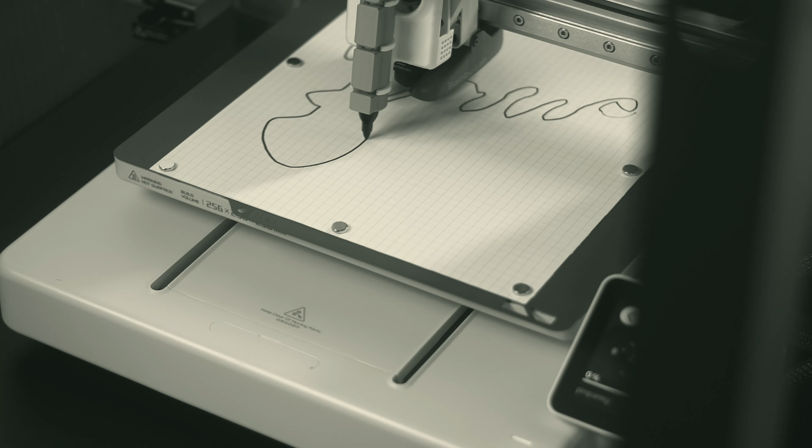I needed a better pen holder for my A1 printer. Instead of just waiting or wasting filament on poor quality prints from MakerWorld, I decided to waste filament on my own design and see if it would work.

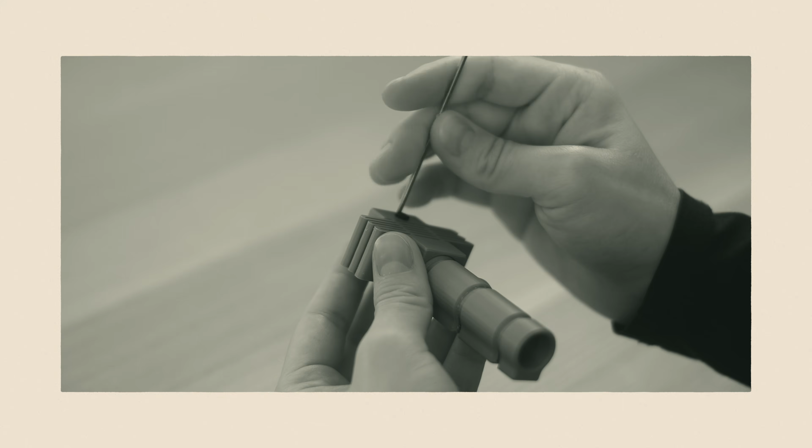My goal was to build a pen holder with only 1 degree of freedom along the z-axis, so the pen can adjust to uneven surfaces and still produce precise, consistent prints. Based on what I learned in my last video, I added a few more requirements: the design should need little or no support and use an optimized print orientation, no screws should drive directly into plastic, and the holder should not damage the pen or print head. It also needs to keep the pen centered and steady, no matter its size, and work with different pens without using tape.

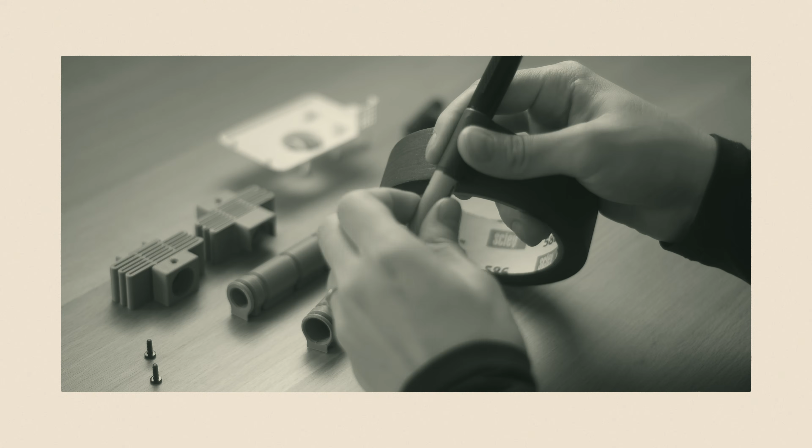With these requirements in mind, I found some good ideas on MakerWorld and combined them into 2 main parts. First is the front cover, which snaps onto the print head with tension clips on one side and holds 2 8mm rods on the other. Because of this design, I could not print it flat, so I printed it vertically on its side and added a rib mesh inside for strength.

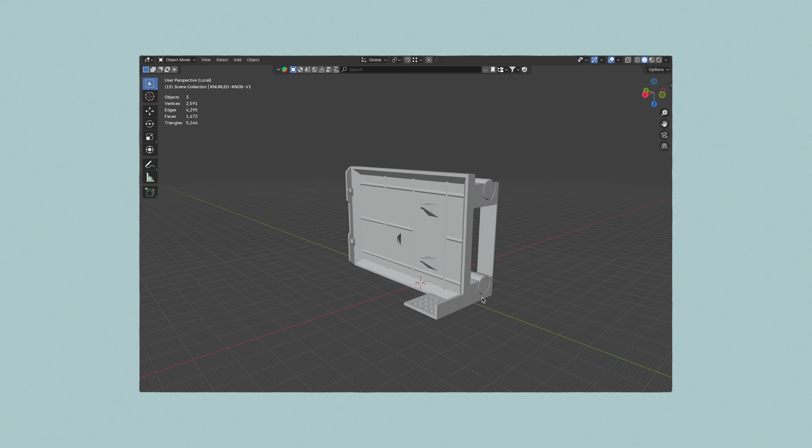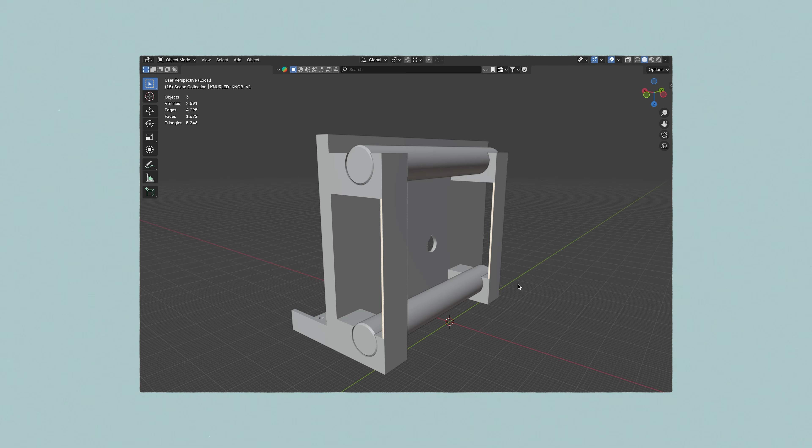To avoid needing supports for the rest of the design, I removed the external fillets and angled all overhangs underneath to 45 degrees. I changed the round holes to teardrop shapes and left the rod holders open at the top. Still, 2 of the 4 rod holders needed support, so I turned those overhangs into bridges with 2 custom support tabs. These tabs are 0.6mm thick, making them easy to remove along the layer lines.

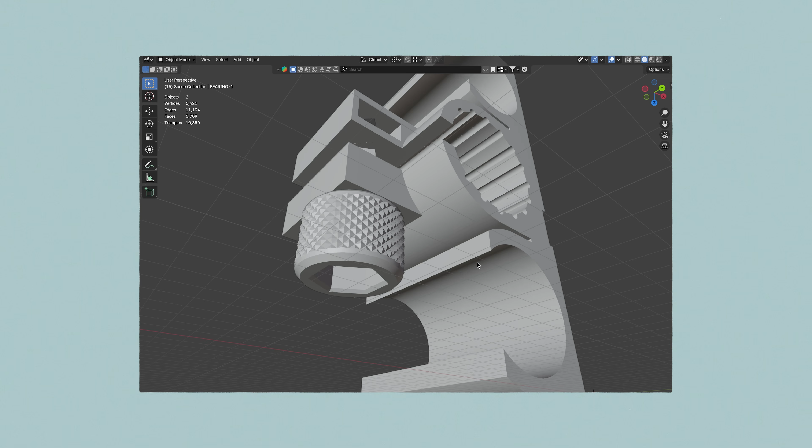The second part has 2 slots for linear bearings on the sides and a central clamp. The clamp is a single split collar with ribs for alignment and relief. I made a custom knurled thumb knob that holds a captive M4 screw, which threads into a hex nut inside the clamp. This setup lets the holder grip thick pens up to 15.5mm wide, and adapters with matching ribs help it fit smaller pens and keep them centered.

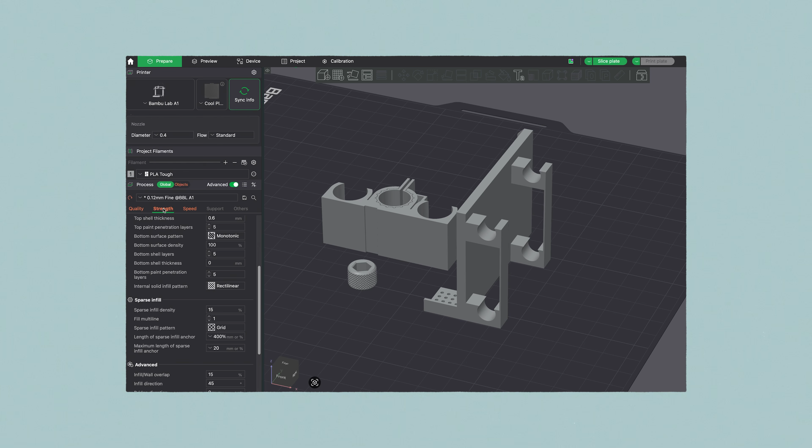In the slicer, I use the 0.12mm preset. To improve bridges, I set the bridge flow to 1.5 and lowered the bridge speed to 10mm per second. I also increased the wall count to 4 for strength, except on the front cover. This choice comes down to our bridges.

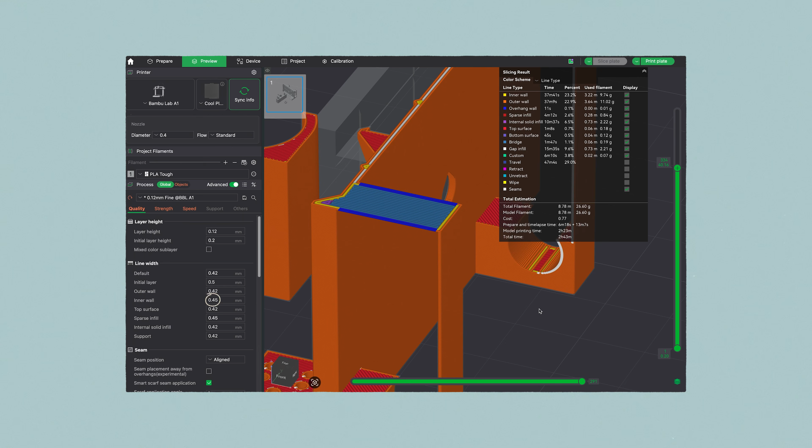In the slicer, the orange line represents the outer wall, with a line width of 0.42mm, and the yellow line represents the inner wall, with a line width of 0.45mm. Then there are the light blue bridge lines. Since my custom support is only 0.6mm thick, even 2 walls would leave the bridge printed in mid-air and probably fail. With 3 or 4 walls, it would almost certainly fail.

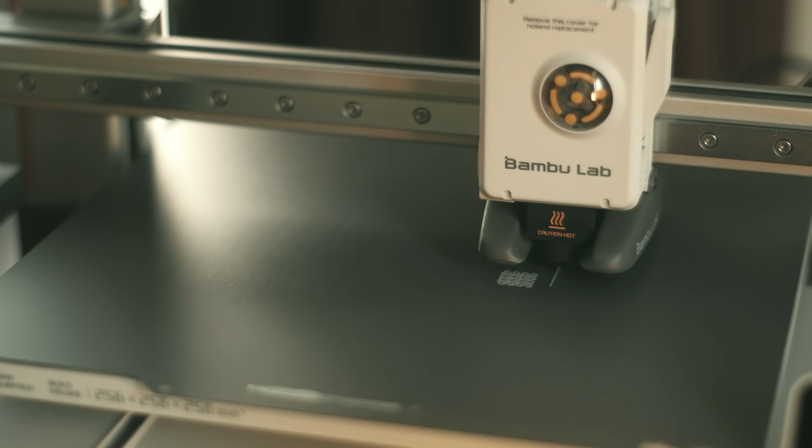I use Cool Plate Super Tack, so I do not need any brims. This time I printed with tough PLA, which is pretty strong and quite transparent. That transparency lets me spot potential failures early in the print. If you look closely, you can see dark lines where the model is hollow.

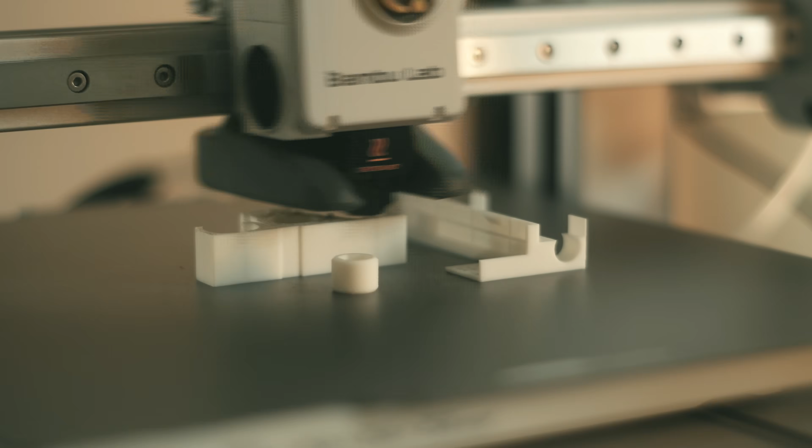I focused so much on bridges that I missed those thin sections. When I checked the slicer, I saw the model was too thin there to fit the inner wall, so I will need to redesign it. Still, I finished the print to see what else might go wrong.

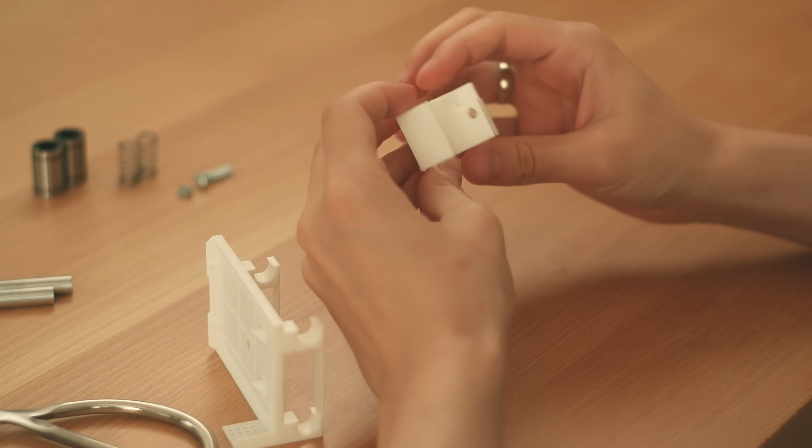The bridges did not fail completely, but they could not properly adhere to the supports. Printing the adapter in place was a mistake. I eventually separated it, but I won't do that again next time.

The nut fits a bit too loosely, but the screw fits perfectly. Although the knurled knob needs a more prominent texture.

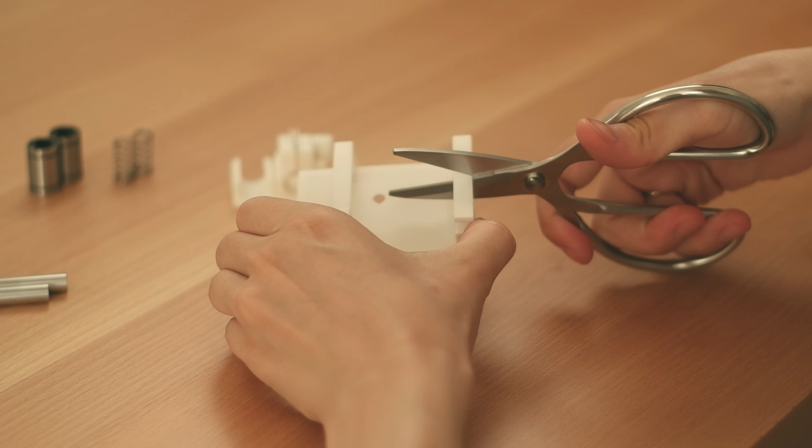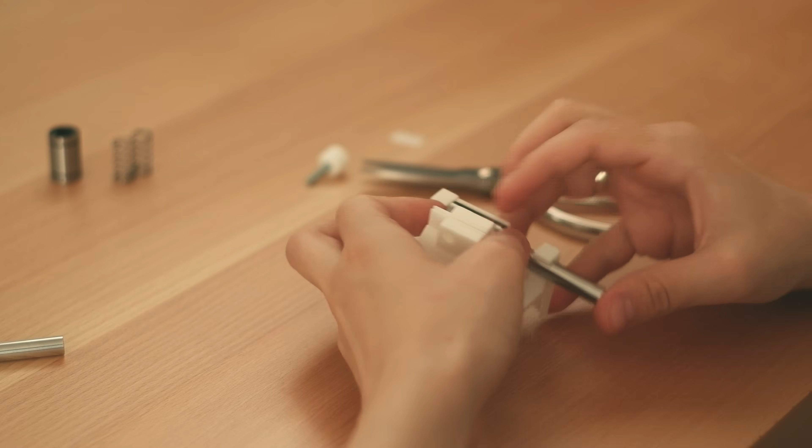Removing the custom support turned out to be both easy and satisfying. The fit for the rods and bearings is too loose as well. Adding clearance to those holes was a mistake, so I will reduce it for the next version.

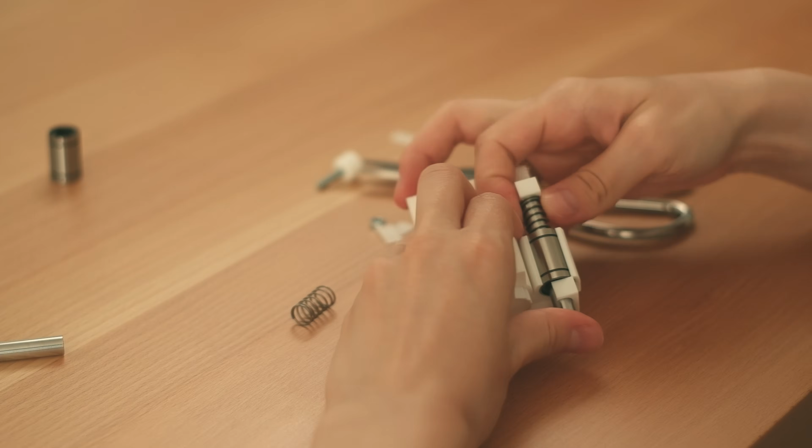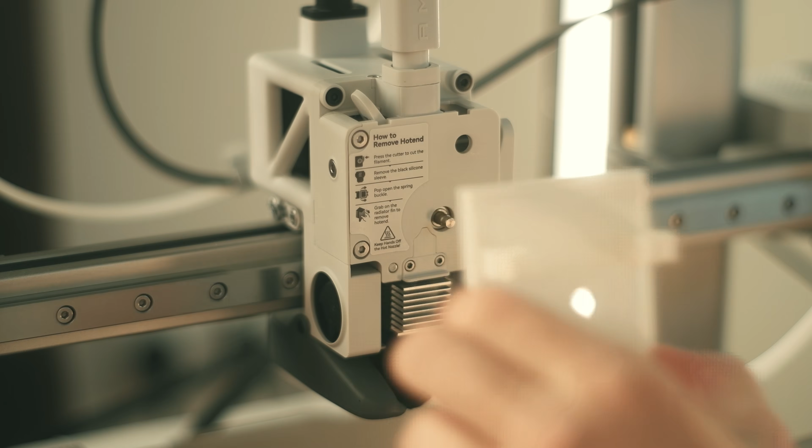I plan to seal the bottom holes to prevent the bearings and rods from slipping out if the spring pressure is too high. Then I checked whether it would snap onto the print head, but it didn't, because my measurements were slightly off.

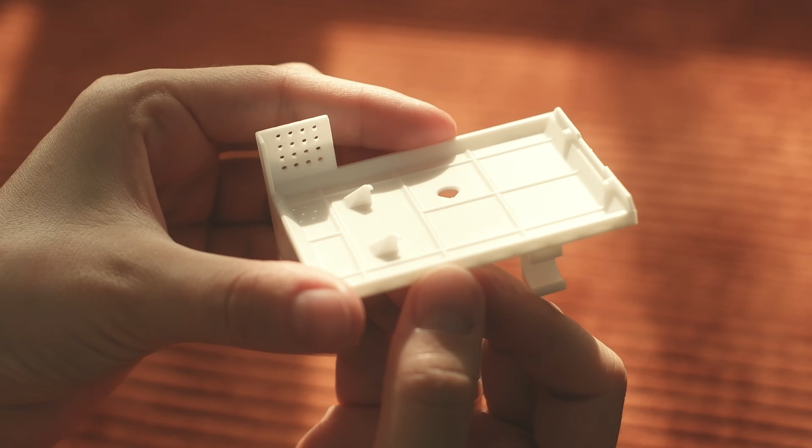Here is a closer look at the print quality and failed bridges. Since the model was not working, I decided to test its strengths. I applied a good amount of pressure, and although it bent, it did not break.

Even with those mistakes, I stayed optimistic. The concept was good, but needed refinement. I fixed everything I mentioned earlier, so I will not go into every detail.

To fix the tension clips that were in the wrong position, I downloaded a front cover with good reviews from MakerWorld and copied its shape and placement. I also added a custom support to the bottom tension clips.

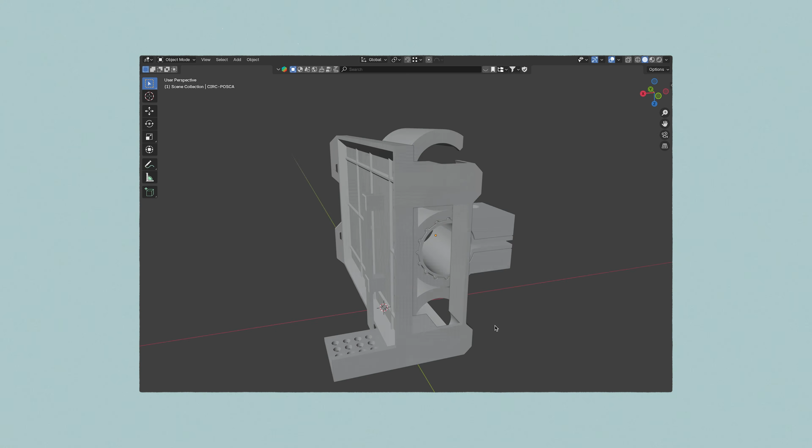To fix the wall that was too thin, I moved the bearings and rods further from the front cover. This made the rod holders longer, so I chamfered them to shorten the bridges. I also made the support thicker.

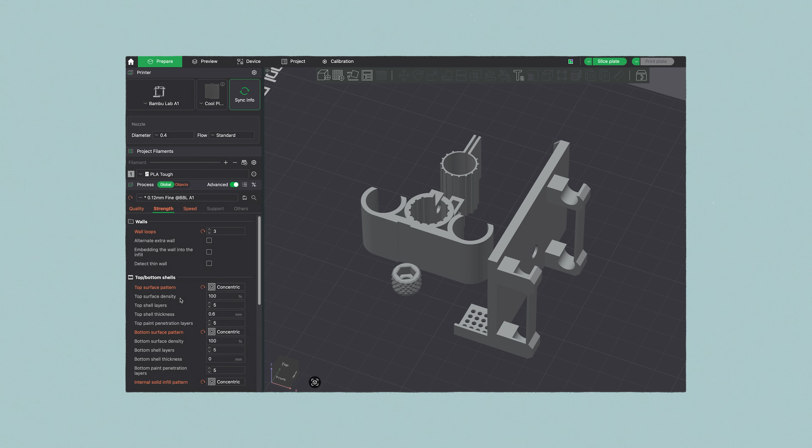The printing profile is almost the same, but I switched to concentric patterns since my models have many round shapes. I used 3 walls because none of the models are thick enough for 4, and I used 2 walls for the front cover again.

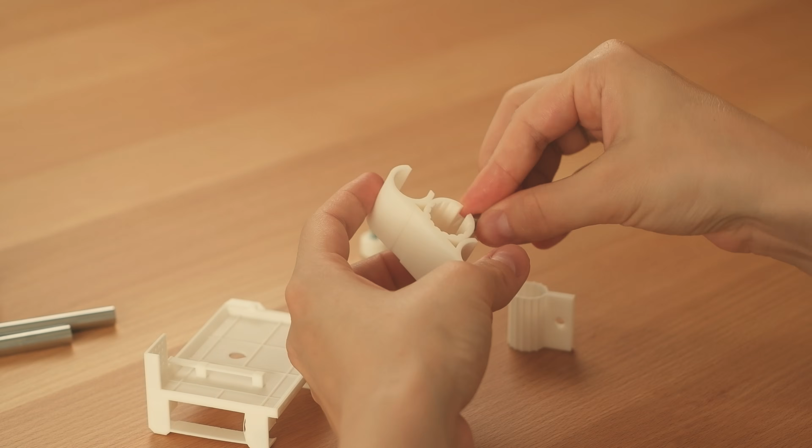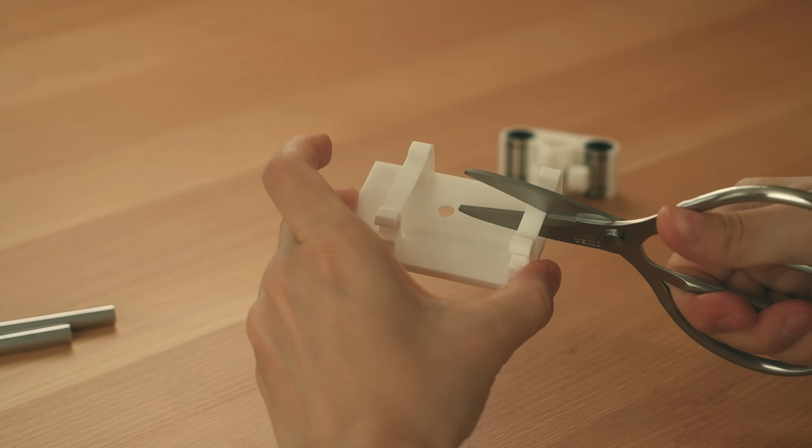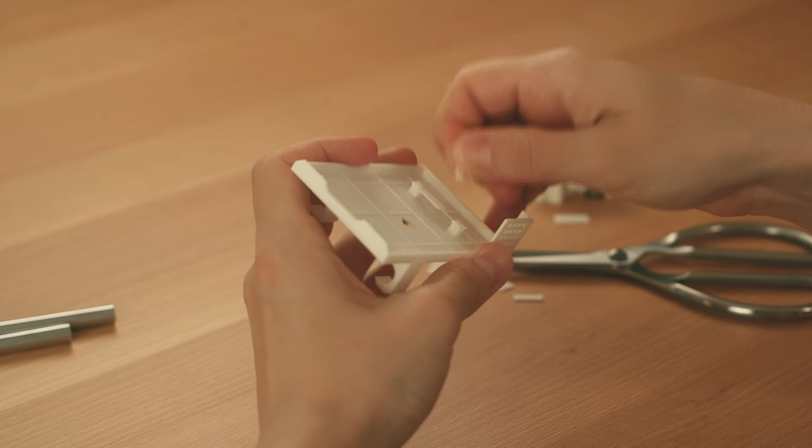I printed this late in the day, fell asleep, and checked the results only the next morning. It looked like all my fixes worked. The supports were a bit harder to remove, but still possible. The bridges were not perfect, but they looked pretty clean.

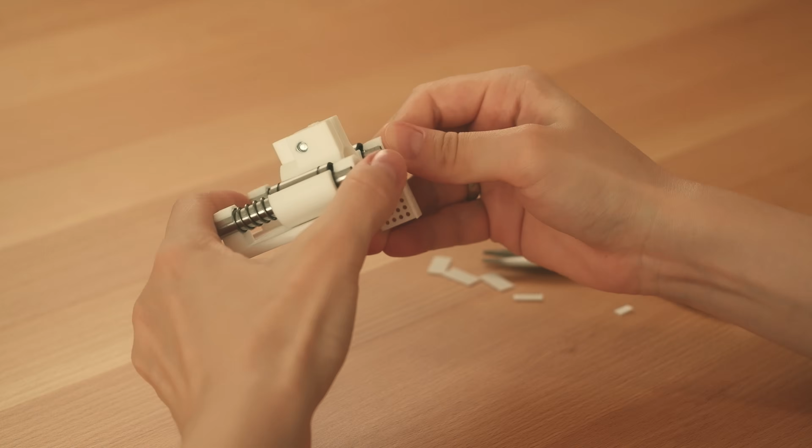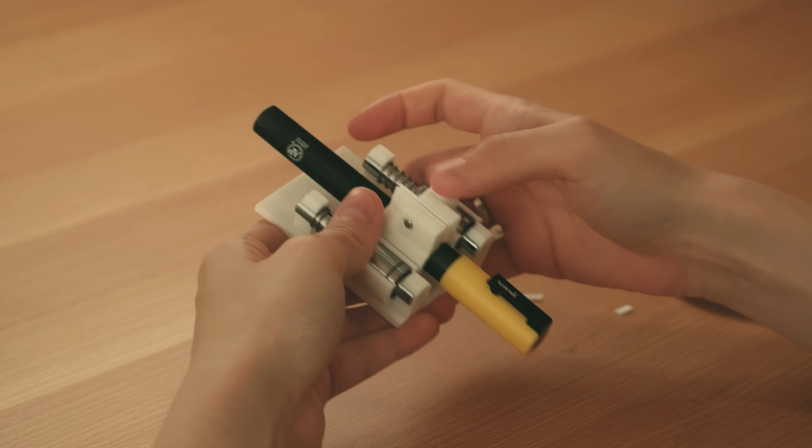The only thing left was to check if it would snap onto the print head. And it did not. Again.

The bottom clips were a bit too long. I sanded them down and snapped the part on later, but the model still needed fixing.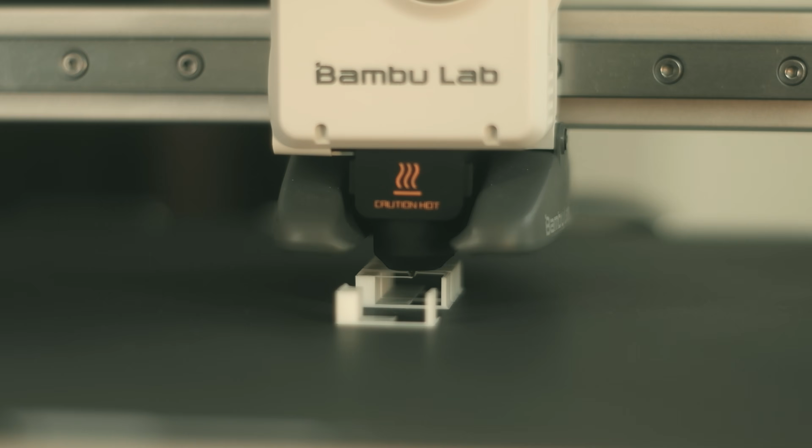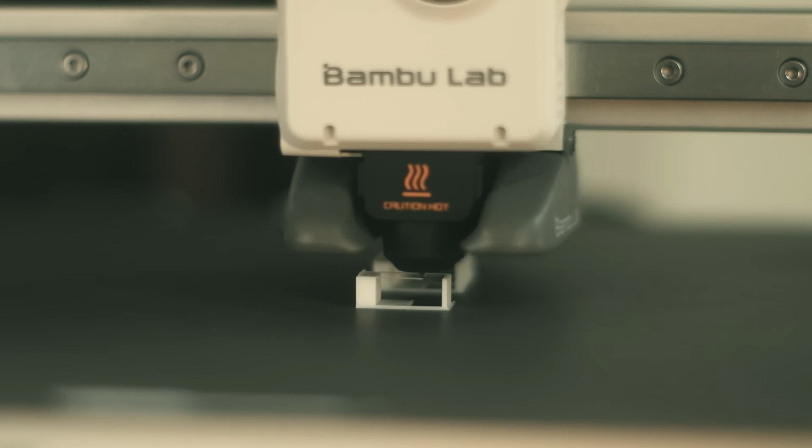Before printing the front cover with the fixed bottom clips again, I ran some bridge tests to see what was happening. I tested flow rates of 1.4, 1.5 and 1.6 at a speed of 10 mm per second, plus one test with the default settings.

I made the support 1.3 mm for all these versions. The adjusted settings were an improvement over the defaults, but slight changes in flow rate made no noticeable difference, and increasing the support thickness did little to help. I think the only thing keeping my bridges from being perfect is long, thin support, which may bend slightly during printing. But I'm okay with that, so I moved on.

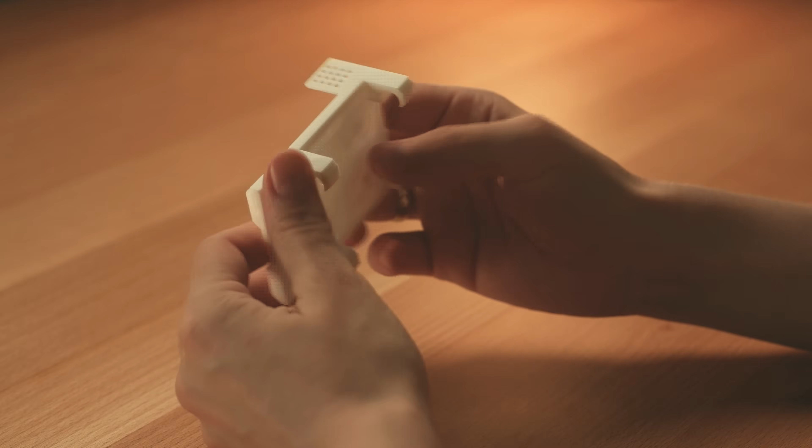I printed a front cover again without changing the print profile, and the print turned out even better. The only variable was the front cover's position. It was printed in the center because it was the sole element on the build plate.

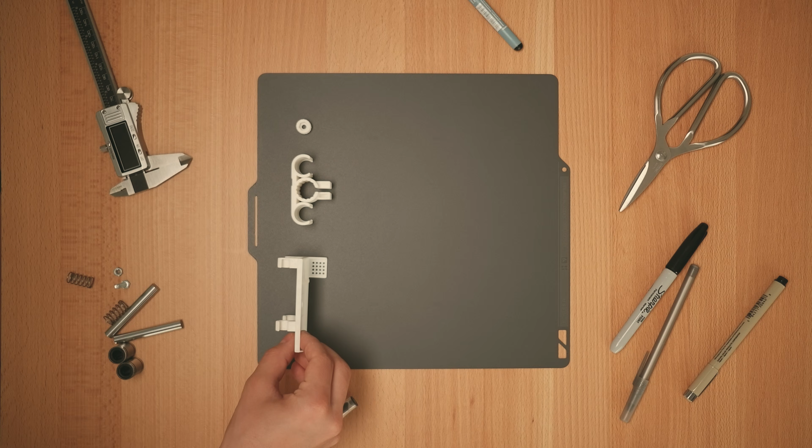Now that the front cover snaps into place, the last step was to create adapters for different pens. I was a bit too confident and printed all the first versions at once.

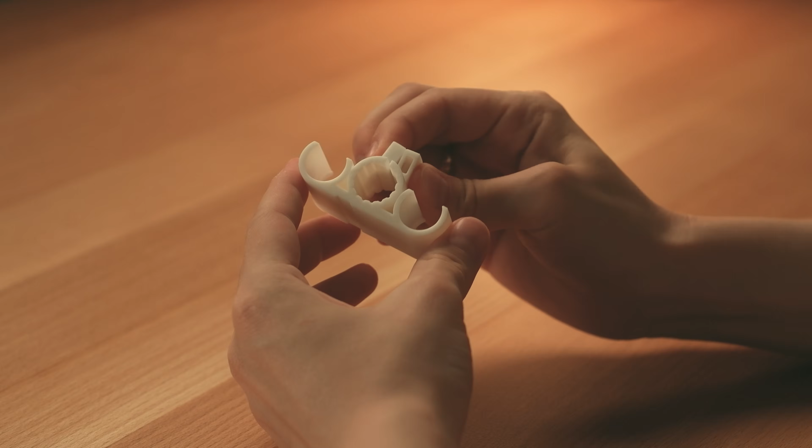But not everything fit because some pens are tapered and the plastic is too firm to bend for the thinnest ones. I fixed the most problematic adapters and the clamping mechanism by adding deeper relief ribs and printing them with an Arachne type wall generator to avoid random hollow spaces.

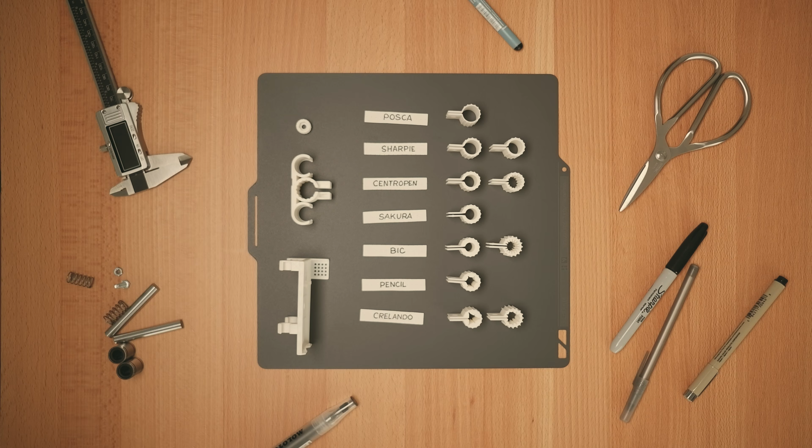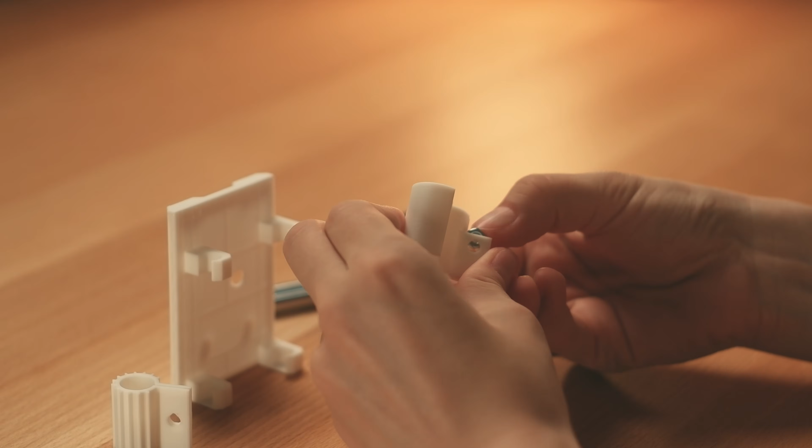Once everything worked, I printed the rest of the adapters. With that done, I could assemble the holder and was finally ready to test it.

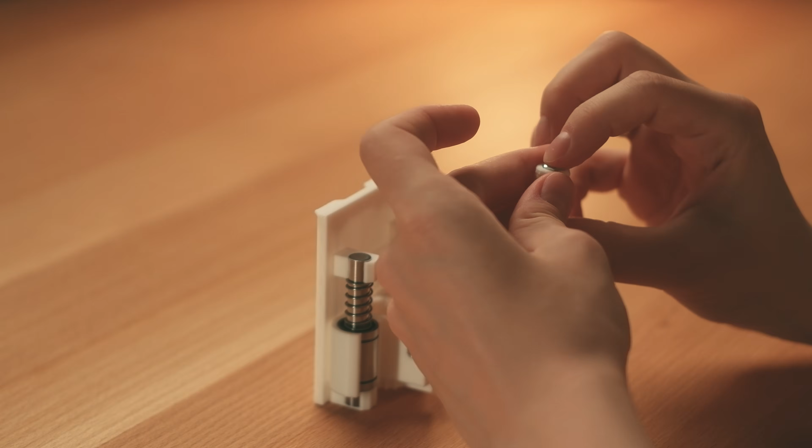The bigger the offset between your nozzle and marker tip, the more pressure is put on the springs and snapping clips during homing. This is when the pen can slide up, or the clips could snap off.

I didn't want to screw the adapter to the print head or use longer springs and rods since that would make it heavier, so the trade-off here is accuracy in settings and pen positioning.

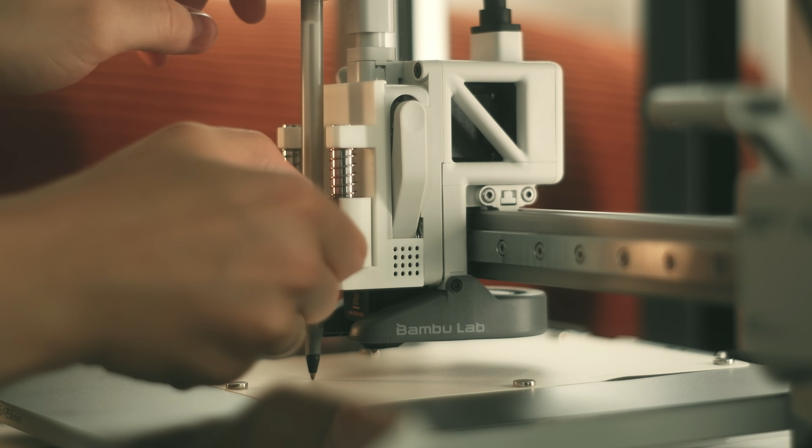Here's, in my opinion, the easiest and most convenient way to position the pen in this holder for the best results. Move your print head to the home position so the nozzle touches the build plate and then move slightly up. At this point, attach your pen so it touches the build plate.

Now you can print. With this setup, your Z-draw should be between 6 and 8. I used 7 for most prints. For a ball pen, use 6. For thick markers, I used 7, but 8 might be better.

A lower Z-draw value means more pressure. My test showed that a single sheet of paper on a SuperTack build plate is less likely to slide, resulting in a more precise drawing. However, you are more likely to see the build plate's texture in your lines, especially with a ball pen.

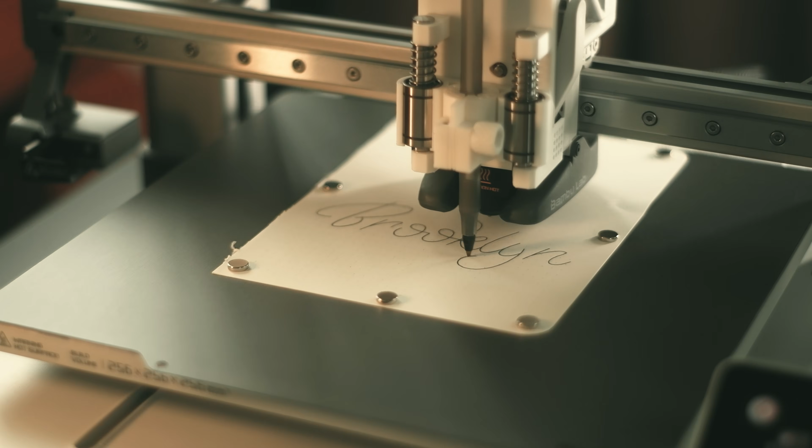I reprinted on the same piece of paper to check whether the pen would follow the same path exactly, and it did. With a ball pen, I also noted that the pen itself does not shift, but the refill inside does, which can affect precision.

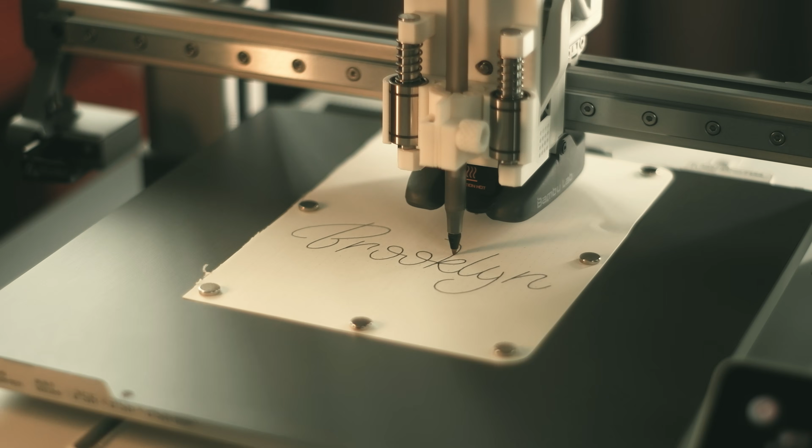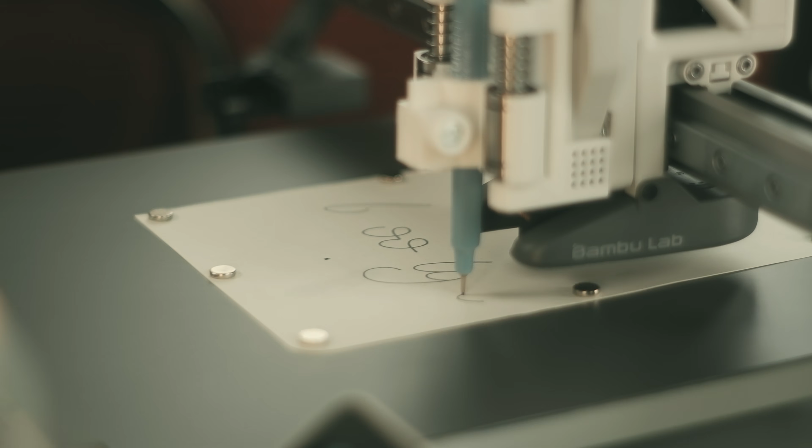I repeated the process with all the pens. 0.5 to 0.7 liners with a 7 Z-draw value were the best for precision. Even pencil prints were good enough.

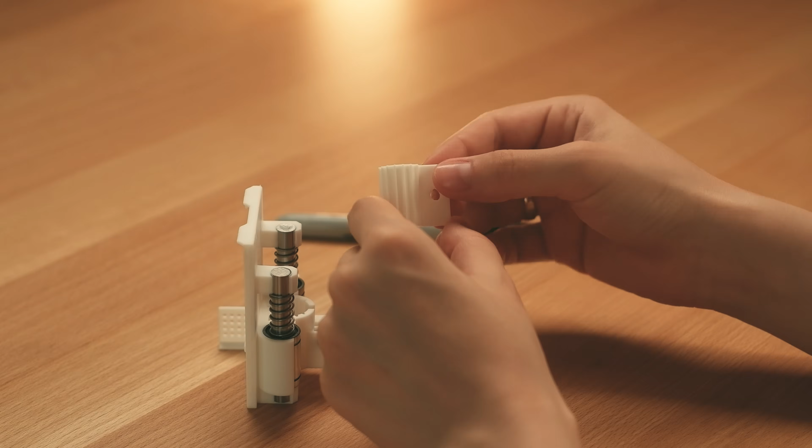Tapered pens like Sharpies or Centropens can slip, so make sure the screw is tightened securely. The adapters for tapered pens are not symmetrical. Use the teardrop-shaped hole as a guide for the correct orientation.

Let's look at the final prints. They are consistent and accurate. There is still slight shifting on long curves, but you probably will not notice it.

Overall, the holder meets the requirements I set at the start of the video, and I think it is good enough. It is worth mentioning that the 3D Plotter app got an update that solves most of the issues I mentioned in my previous video.

With my new holder and the improved software, I plan to make another video showing a real use case for this plotter setup. The holder with 6 adapters is available on MakerWorld for just one like under this video.